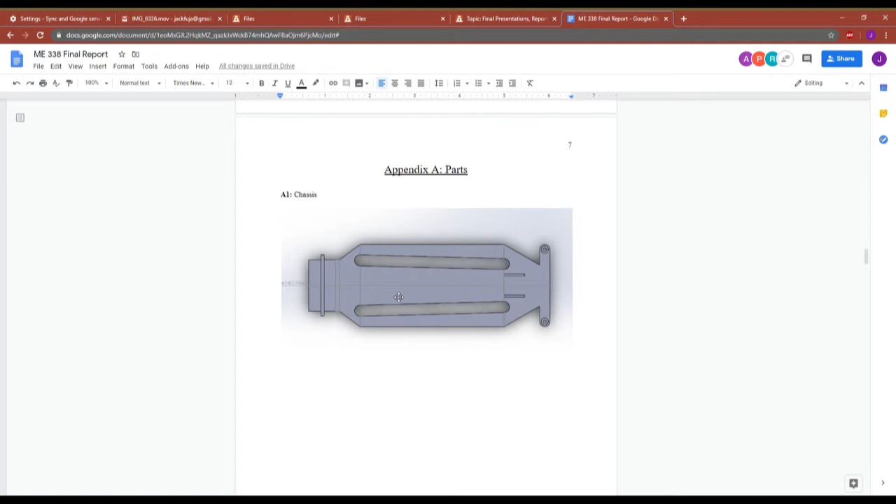All right, so our first choice with this was to 3D print the chassis because the ABS plastic would be lightweight. It would also give us a lot of flexibility in some of the more detailed design components. We chose a pretty basic rectangular body. We added slots running down the length of the body because our original goal when we were going to build this car in person was to use those slots to zip tie things like the battery down to the body instead of having to pin them in place. We also angled the tire wells to provide an improved range of motion.

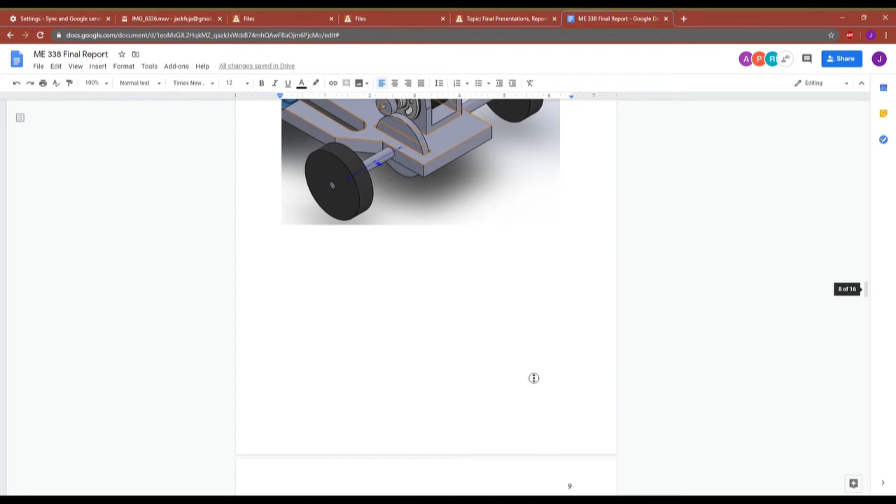The next step that we did was to calculate a reasonable impact force on the front of the car. So we decided the most likely time that our car would suffer a collision would be when it was turning a corner and hitting a wall. So we chose that to be at about half of the max velocity, so around 7 meters per second. And so we then needed to find the stiffness of the material since the impact force is a function of the velocity and the material stiffness. So we found the stiffness by running a displacement simulation in SolidWorks.

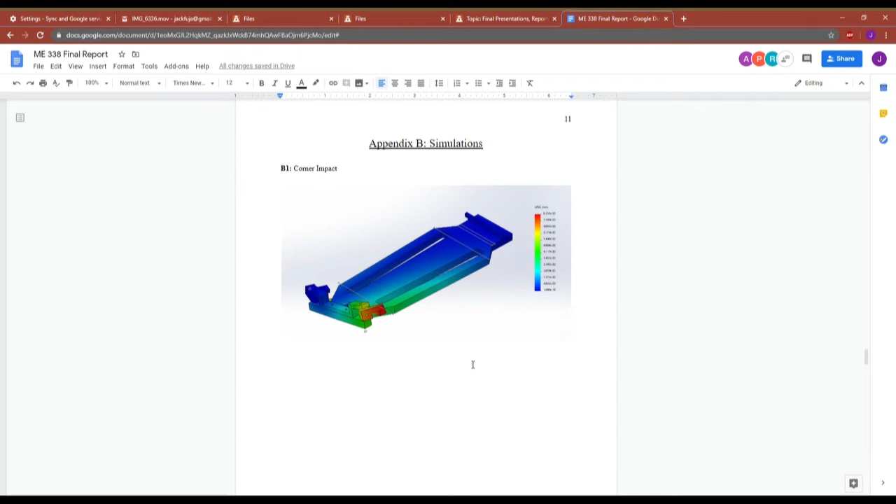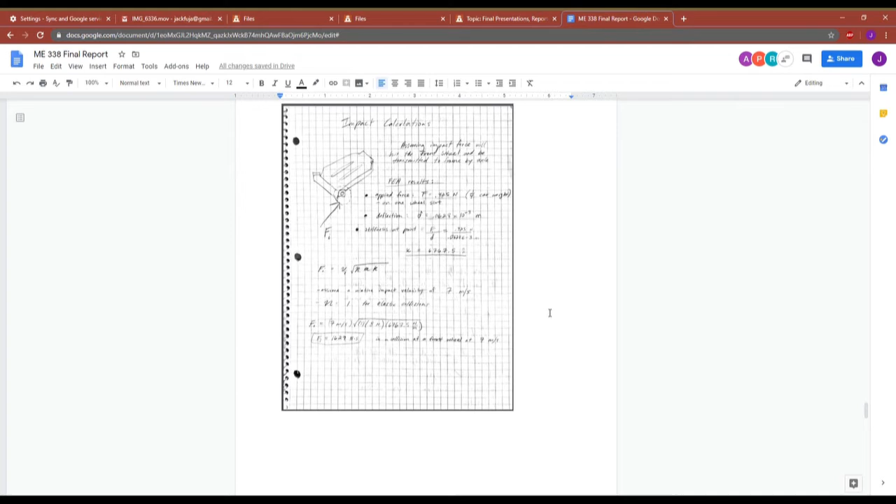And so then we were able to arrive at a displacement force of about 1,629 Newtons. So we figured this was a reasonable force to expect just because of the material that we chose and the desired speed. And we decided that the ABS plastic will withstand this force, that it was an acceptable number. So we moved on to the drivetrain after that.

I'll be talking about the drivetrain. So one of the main tenets of our philosophy throughout this whole thing was to make everything as simple as possible. And so the first thing we did was try to do just a 1-to-1 simple gear ratio from the motor to the rear axle. And we wanted our top speed to be around 14 meters per second when we did our calculations, because we figured that if we had our calculations set that high, then realistically it would operate between 11 and 12 meters per second due to unaccounted friction, and that's what we thought was reasonable.

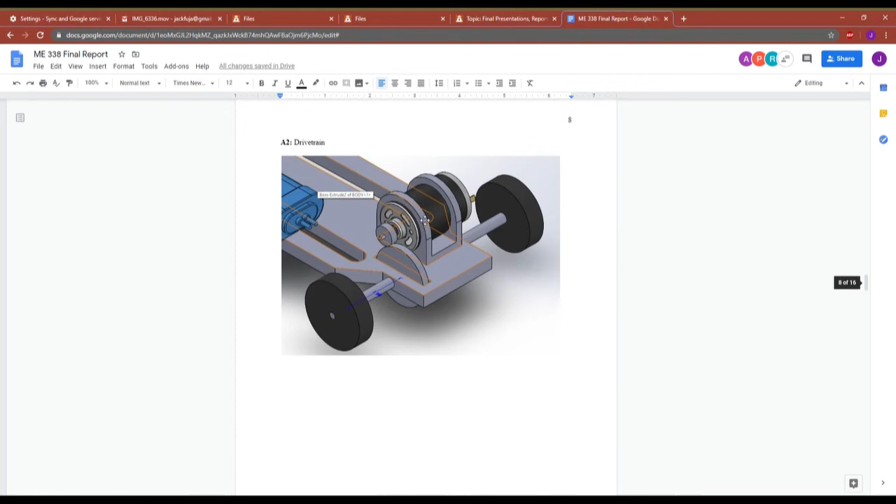So as we were going through the 1-to-1 gear ratio, we realized that it just wasn't going to be feasible. The motor was going to spin the wheels too fast for it to make sense realistically. So we went back to the drawing board using this 1-to-3 gear ratio seen here. And in all of the calculations, as you can see here, we just followed the step-by-step procedure we did for the tests and homeworks and all that.

And we got the axle torque to be around 29.66 millinewton meters, the motor torque to be 10.52 millinewton meters, which using the TS graph for the specific motor we have gave us around 21,000 RPM at the motor. So that gave us 7,000 RPM in the rear axle using the 3-to-1 ratio, which gave us a max velocity of 14.66 meters per second.

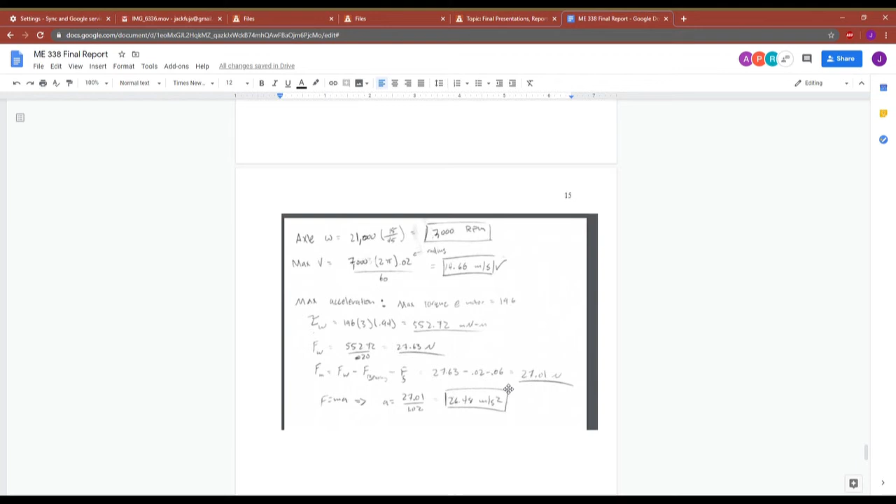This was above what we wanted, the 14 meters per second, but we didn't reiterate because, like we said, that number seems really high on paper, but realistically, it's not going to go that fast due to things like the ABS plastic causing unaccounted friction, the ball bearings messing up, things like that. So we just kept it high on paper so that hopefully it'll be average in real life. And then just following the math, that gave us a max acceleration of 26.48 meters per second squared at the stall torque of the motor.

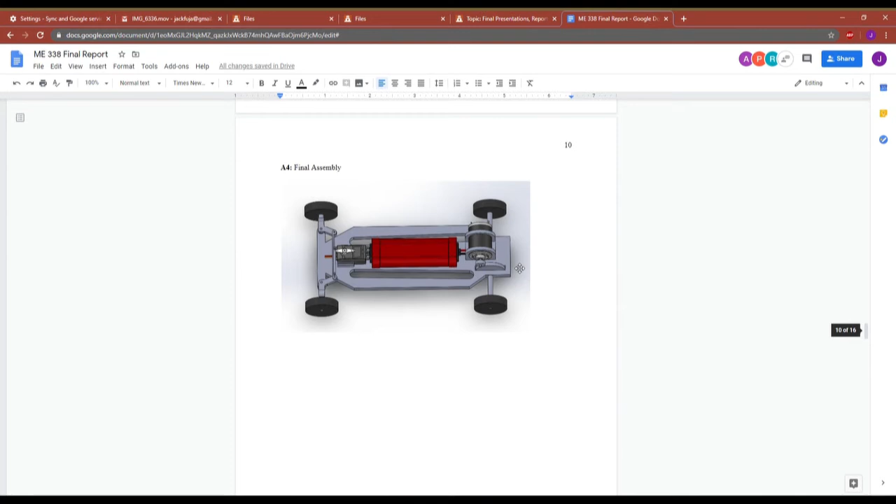And then once we had the drivetrain on paper, we modeled it in SolidWorks. And the way we connected it was, as you can see here, we mounted it above the rear axle using these two fins where we just slide the motor into place. And then we modeled the gears just as simple discs because we weren't too sure how to do a gear in SolidWorks, but this works well enough for our simulations.

So that was kind of the extent of the drivetrain. And I think now Andrew's going to talk about what we did with steering.

One thing to note about the rear axle is that the way that we CAD'ed it, there would be no way to actually assemble that if we printed those two pieces together. So the solution to that would be to split the axle into two pieces, so we could slip the axle through the holes in the back of the chassis and then super glue them into place, and then we could put the gear in the gear slot and then slip those two pieces into place for the sake of assembly.

Andrew, I think. All right.

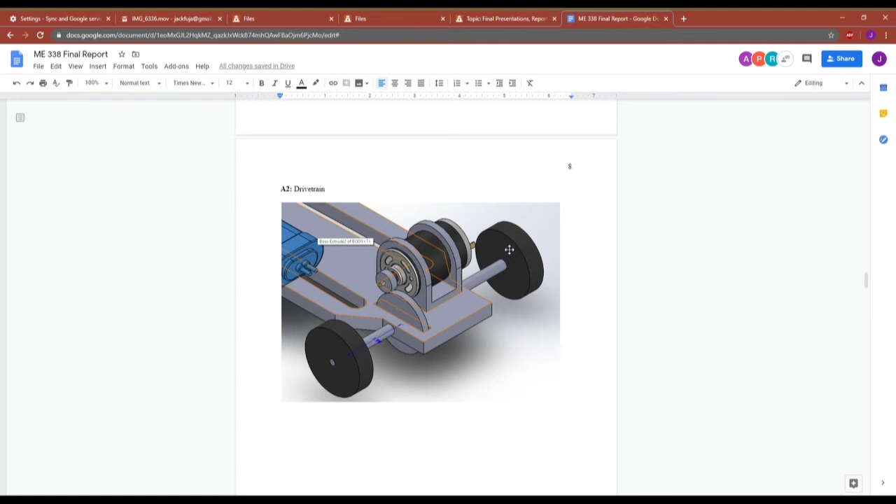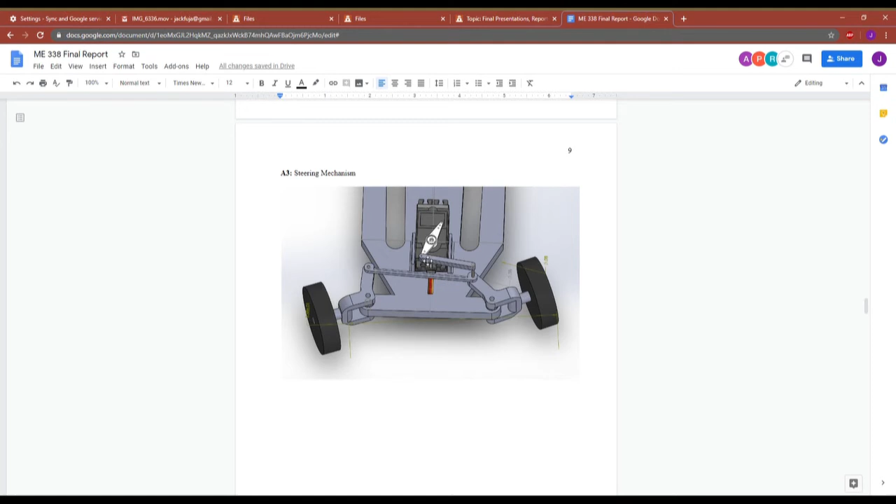Yeah. So for the steering design, this is one part of the project where we had a lot of options and different ideas. So we ended up going through a couple of sketches and deciding on this 4-bar steering mechanism that you can see has the servo connected to a little servo arm that we ended up double layering because it was a little bit weak at first. And that connects to the control bar, which you can see connects to both wheel bearings.

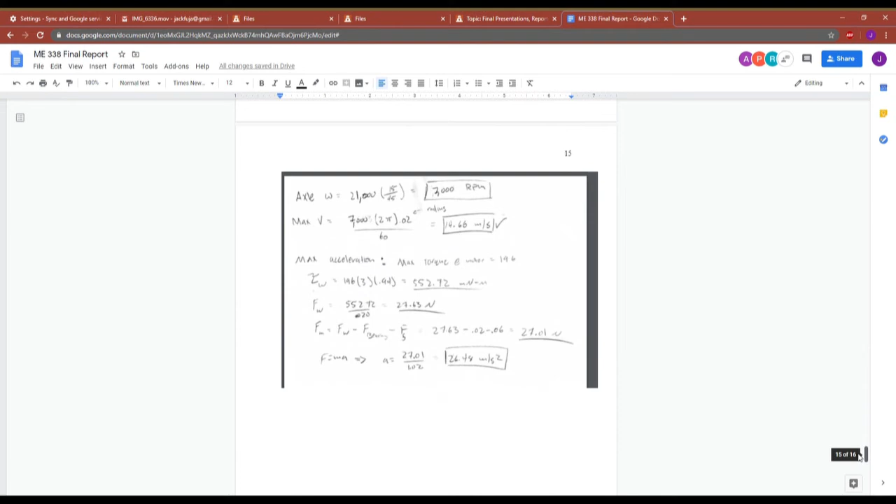We ended up choosing this one because it allows only a small difference between the angle of both wheels, and it actually allows the inner wheel to be turning at a higher angle, which you want for Ackermann steering geometry, which is what cars and steering mechanisms rely on.

So when you calculate the turning angle, you use the outer wheel because that's the minimum turning radius. And 28 degrees gave us a radius of 19 inches, which when we considered the track that's usually raced on, we figured would be a fine turning radius to get around the turns, even U-turning.

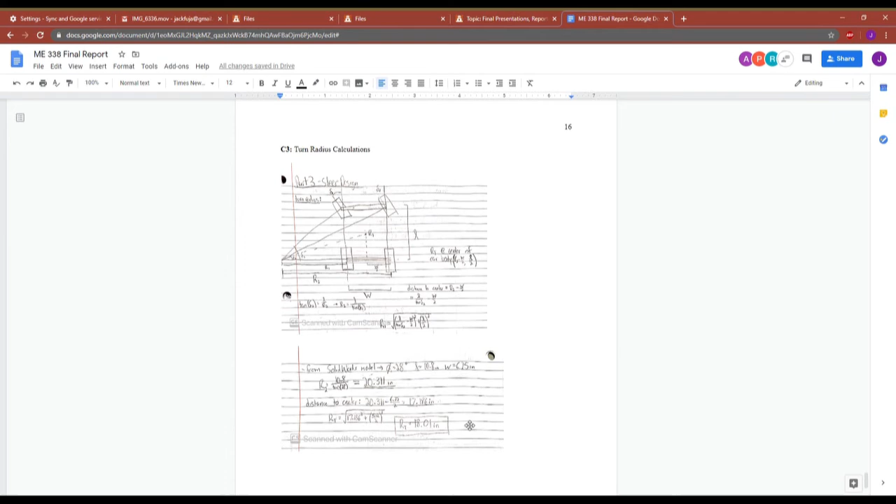And since this mechanism was actually the most complex of the three, we went through a couple failed attempts before we got to this one. And we're going to use these 1.5 inch number 8-32 3/4 threadless screws for the wheel bearings so that it can rotate with the servo.

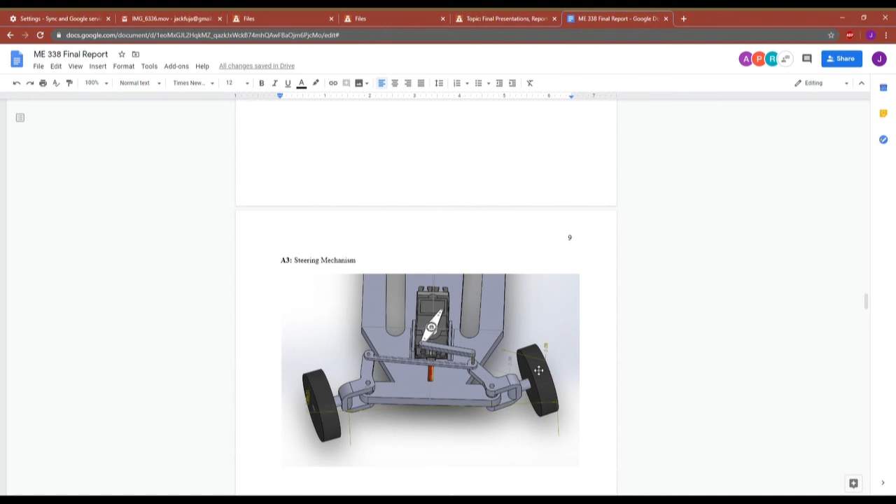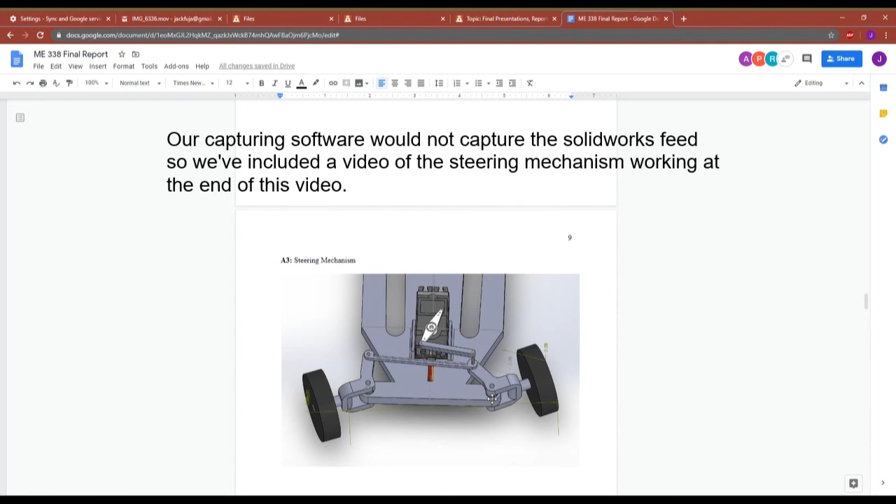All right, and then I think, Perry, you want to talk about how we assembled it all together at the end? Yeah, sure. So after we completed the three main components, all we had to do was combine them all together and run our fatigue and stress simulations. Because we lacked some knowledge on things like zip ties and glue and tape, we just used the mate method in SolidWorks to combine it all. So the motor is mated, but that would be super glued. The battery, which is centered, we would use our slots to zip tie that down.

We also put the battery in the center of the chassis because that's probably one of the heavier components, and we wanted to maintain some balance. We don't have the motherboard and the receiver included in this, but those are pretty light parts, so those would just be on either side of the battery, also for the sake of balance.

We didn't know how to model bearings either, so where the bearings would be on the front axle is just where the wheels are mated to the steering mechanism, and on the rear axle the bearings would be holding up the axle on the chassis. And that's pretty much it for the final assembly.

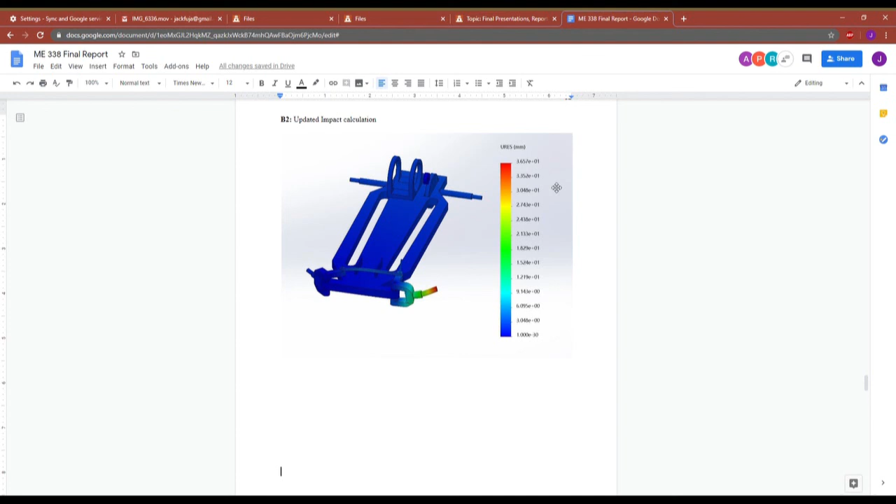And I think that's about it for our video presentation. We were bummed that we had to do it this way, but I think you can see we made the best of what we had and the way that this class works now.